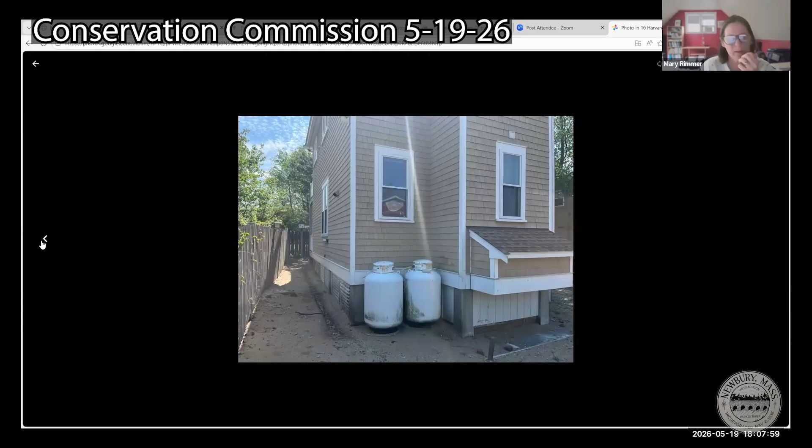They may have had on-house work done, but there was no signs of any ground disturbance or anything like that. Okay, but we don't know whether or not there was any requirement for maintaining dune vegetation or anything like that. I didn't see anything in the order, but I can double check that.

Harvard. Yeah, there was no written special conditions on the order that's attached in the folder. Okay, I don't think we have too much choice here, so.

Another one. Yeah, yeah. Hey, and then Mason, we're getting some feedback on - you know what, what did you just do, Mason? Did you? I didn't do anything. That was me, Bob. I've got a noisy air conditioner. I'm going to dial it down. Okay. Thank you, Mick.

Mary, anything else? No, thank you. Okay, thank you, Mary. Well, I'll skip over Mick. Frank, any questions on this one? No, Bob, I don't have any questions. Thank you. I'll wait for Mick to pop back just to see if he has any.

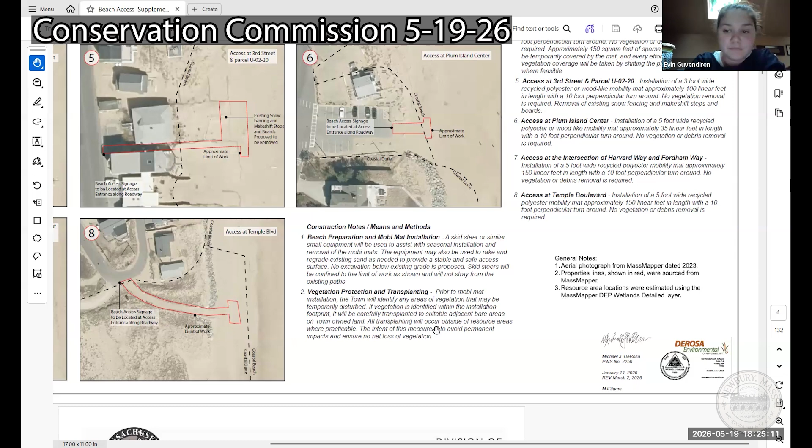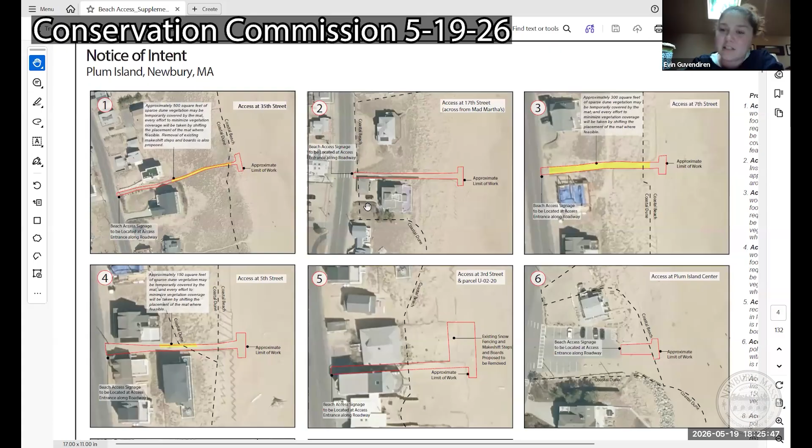At the last meeting, which was quite a while ago, an abutter had requested some signage be installed at the entrance of the mats to promote leashed dogs. So we've included signage at the entrance of all these access ways to remind pedestrians to keep dogs on leash, not trample the dune vegetation, and remain on the path.

So those are the main updates. I can also show you the letter of no take with conditions from Natural Heritage.

They had requested four conditions to be included in the order: a time of year restriction, April 1 to August 31st, which is breeding time of year for shorebirds; and the beach grass transplanting note I discussed earlier. The authorization duration says this letter is issued for 5 years.

And then there's the Wetlands Protection Act notice. We did include a shorebird protection plan in this order too, if the commission wishes to reference it in the order. That will be followed if activities take place during the breeding season. But that's pretty much it for updates.

Happy to answer any questions the commission might have. I'm just curious, is the leash law now part of our wetland protection bylaw, or is it?

It just seems strange that we're putting notations about leashed dogs in an order of conditions. Not that it's not a good idea, but I think the signage was just requested. It's not an enforceable condition in the order, it's just a friendly reminder to pedestrians. So it's a suggestion. Unless you choose to add it to your bylaws.

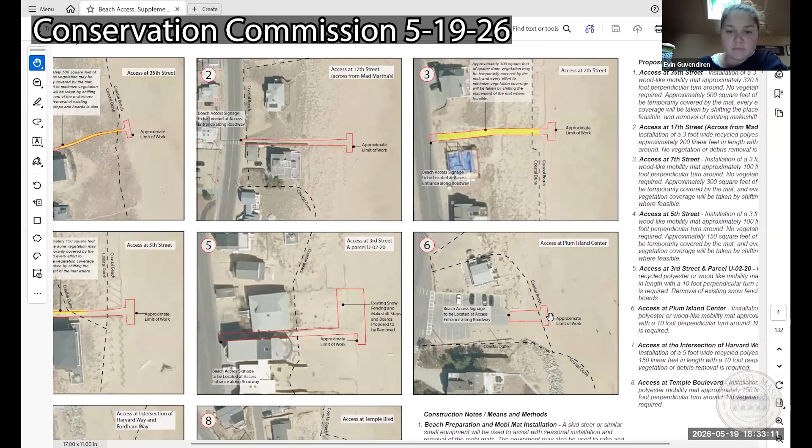Okay, so we could condition it that it not be used for vehicles. Mm, vehicle use, yeah, I mean, they're not wide enough for the typical vehicle anyway, 5 foot one, but just to clarify.

There was a note on your plan about grading and raking. I wanted to review the language a little more because we can't change the beach form or dune form as part of this project. We need to work with what's there to a certain extent, except for evening it out enough to actually roll the mats out.

I wanted to see where you said the equipment may also be used to rake and regrade existing sand as needed to provide a stable and safe access surface. No excavation below existing grade is proposed. So you would not be grading anything technically on the beach itself.

It probably doesn't even lay the mats right on the beach itself. It's just where the dune is kind of blown out a little bit. Correct, yeah, it's just the incline of the profile.

There was some discussion in the supplemental material that the skid steer would push material up from the beach onto the dune, and I don't think we want to be doing that at all. Where did it say that, Mary? I didn't see that.

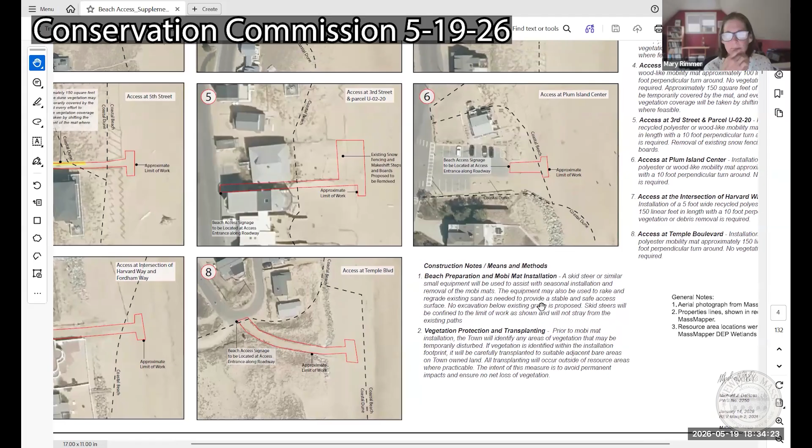The narrative part? Yes, your supplemental narrative. Usually it would come from an upland source, not off the beach, you're not introducing any material. No, we're not introducing material.

It says they want to include raking of existing beach sand, including skid steers as needed to provide safe access. It's not proposed to bring in any sand or remove any sand from the beach. So I just wanted to be clear that we're not going to be pushing sand up from the beach onto these areas where the mats are going to go.

No, and you guys can condition that if you want to explicitly say that in the order too. Just wanted to make that clear. That's all I have for now. Thanks, Mary.

Woody, any questions for Evin on this or Mason? I'll just make the comment on the signage. We don't have a leash law in town, but suggest leashes for dogs and for people, because they both can wander off the path. Some sort of wording for people as well to stick to the path. That's all, otherwise I don't have any other comments.

Thank you, Woody. Mick, any questions or comments? I just noticed the term that they were seasonal mats.

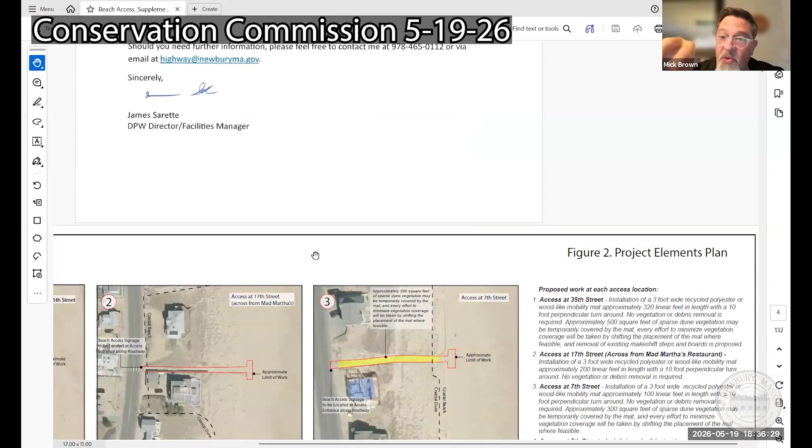So are those delineations on your plan also the limit of work area? Yes, approximate limit of work. Okay, so what's the method for marking that, so a skid steer operator knows where he can and cannot go?

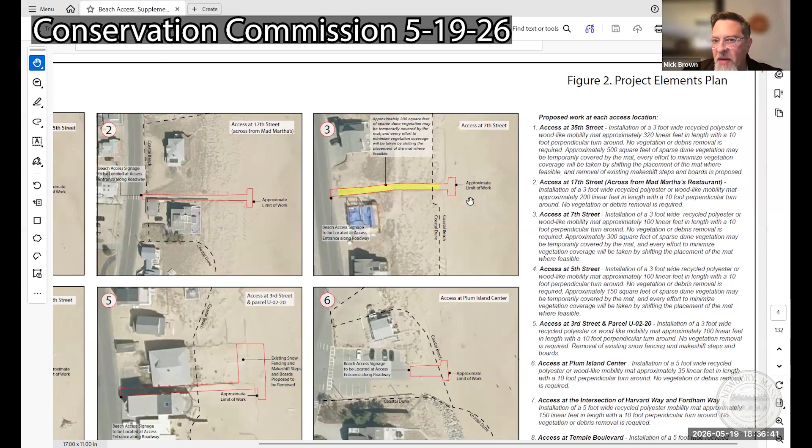From a practical standpoint, having seen these installed for the last decade or two, picture a carpet runner that gets rolled out starting at the top, then rolled up and carried off. It doesn't weigh hundreds of pounds. It's more like a 4-foot carpet runner, but made of a Scotchgard type of material, so sand and moisture pass through it. Blowing away is more likely than needing a machine to take it in and out.

The only time a machine would be needed is for restoring some of the right-of-ways to a decent condition. Okay, well, that's helpful, thank you. Frank, any questions on this one? No, thank you.

I don't have any questions. Mason, do you have anything to add? I'd just say I think you're right. From DPW's eyes, we're not going to bring machines on the beach unless we absolutely need to, so rolling them out from the roadside will be easiest. The only time we'd need machinery would be to establish the paths before they're actually rolled out and laid out.

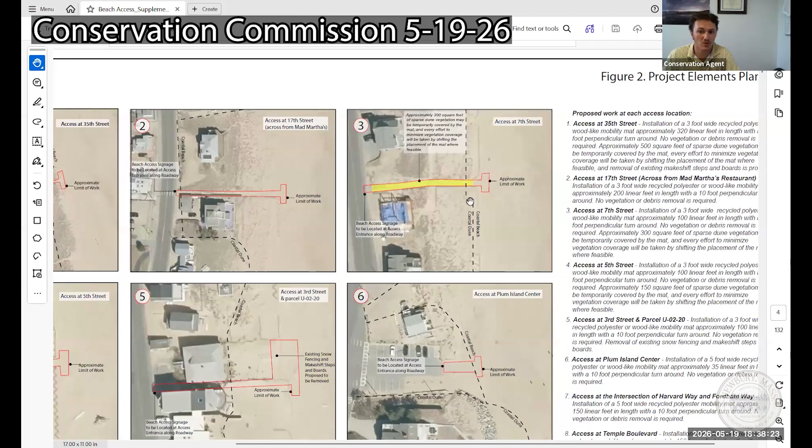The only other thing I'd add is I talked to Amy with Natural Heritage earlier. It's up to the board, but since the determination letter was issued, I believe if the board is comfortable approving tonight, we're allowed to condition it, confirming our shorebird protection plan after the fact—so that would be prior to the start of any work.

Okay. Are there any other questions from the members, Mary? I want to circle back to make sure you're all set. I communicated with Mason late this afternoon about some special conditions on this one.

I'm amazed because the Blue Hotel had stairs and beach management stuff, and other than having a monitor during shorebird season, that seemed to be the only thing, and it worked fine with DEP and Natural Heritage. I guess the point is the town is trying to be proactive here—they've been maintaining right-of-ways and putting in mats for the last 100 years, or private parties have been putting in the mats. I'd rather make this more accommodating than punitive.

I don't think the Blue used a skid steer though—they didn't have equipment that they brought. But they talked about putting sand over rocks in their beach management plan, though not mining it off the beach, but working in the upland, which would be the same situation for trying to maintain a right of way that may have wind-driven sand blown one way or the other.

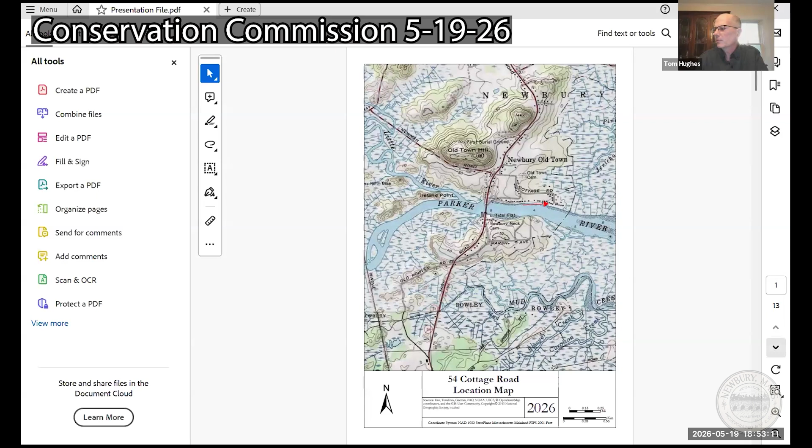So you should be able to see my screen now. I'm just going to flip past all these things. So the neighbor that we met with is John Proto Pappas, I believe is the name. He's across this sort of shared drive that accesses the property.

His view is through the understory over the septic system, kind of in a little bit of a wedge. He sees under the canopy of these trees, and it's mostly lawn under there, with a break in the shrubs along the shared drive that he sees through. Our plan in the floodplain alone has a couple saplings right out here. We looked at them in relation to the septic, and they just weren't a good idea anyway. They're out of the riverfront, so we're not going to do those.

But we are looking to increase the size of the saplings we'd be planting closer to the river so that the planted canopy is high enough off the ground. We estimate about 6 feet is what he's looking at under right now, so we'll make sure the bottom of the canopy on the saplings that go in is 6 feet or taller, so that we preserve that ability to look under and see the river.

We're also going to look at the shrub placement that was in that area and some of the species. We have some 7-ish foot tall shrubs. We're going to try to just adjust the heights, keeping with good native plants for that area, and adjust locations slightly to try to have the least negative impact on that neighbor's view. We can still meet all the requirements of having a good native restoration area by just adjusting our plantings a little bit.

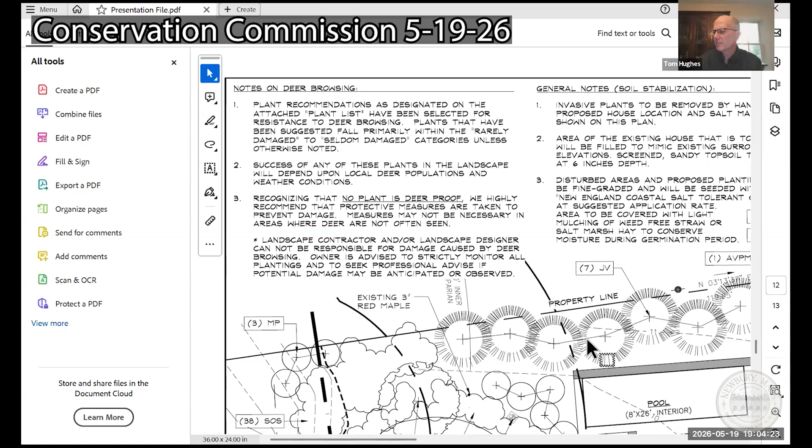We do have on our landscape plan red cedar going in that area to create a buffer, but in their comments, sent in today, I barely had time to read them, but I think they were stressing their desire for this to shift.

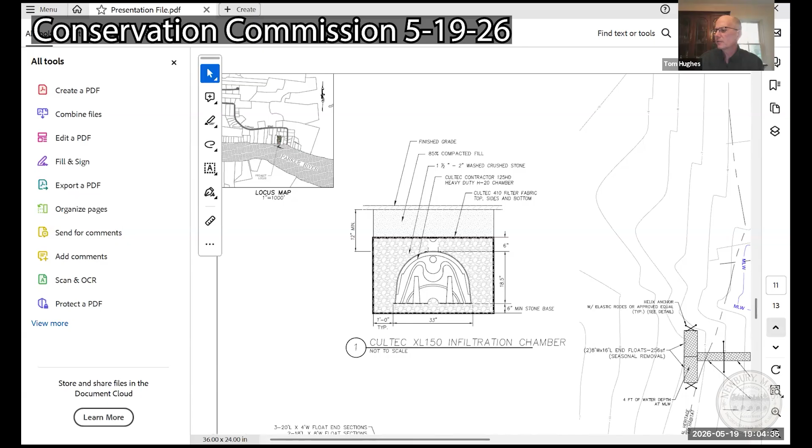And when you look at the constraints we're under - while there's not a specific section of the regs on ACEC, it does say if you're doing anything in Wetlands Protection Act in the ACEC, you can't adversely affect the functions and values for which it's been listed as an ACEC. And generally DEP always tries to get you as far out of it as possible. So I do think I can still make a case that we're certainly not adversely affecting if we're only going in 12 or 14 square feet versus what we are now.

But we have a septic system here. There's a mandatory offset to a septic system. My experience has been that if we were replacing the septic they might let us get closer to a garage if that was our only place to do it, but certainly not much closer. But where we're putting a structure, they're going to hold us to 10 feet at the Board of Health off that. We're at 15 because of the location and grades associated with the septic.

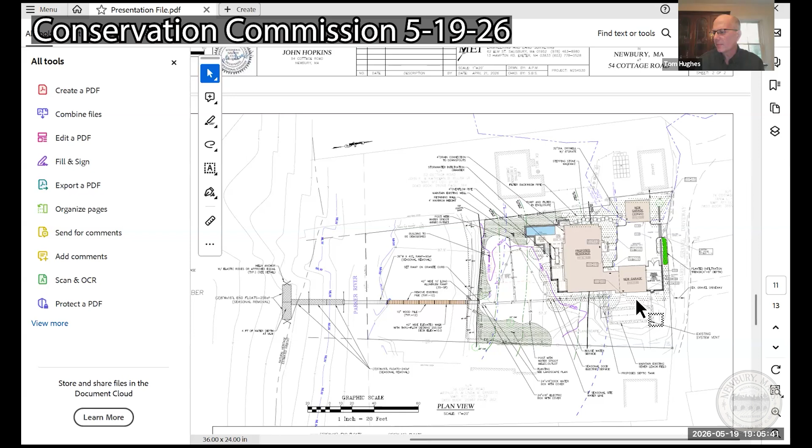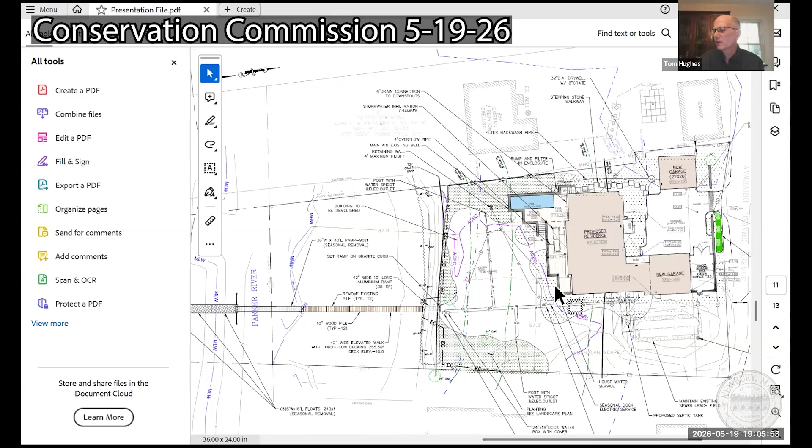But the engineer looked at it and said he could slide the tank over a little bit, and he thinks he could make 5 feet work. But the reason he hadn't pushed the engineering on that was because the goal we had talked about as a team was getting entirely out of the ACEC, and sliding this ends up bumping over that line. So we're up against it - the ACEC pushes us out, as do the riverfront regs, which generally try to push you further out. If I use the hybrid approach, degraded lets me stay closer to the riverfront, but the hybrid approach also makes me respect the 10.58(4) requirement to be as far from the riverfront as possible. So we kind of have to slide back from the river, out of the ACEC, and over from the septic.

So it forces us to be in this general pocket, but we might be able to wiggle it and create a little bit more room. And if we move it 5 feet or even 4 feet, that almost doubles the separation to the property line. I think that would be a meaningful improvement for that neighbor. So we do want to give it a good shot at trying to do that.

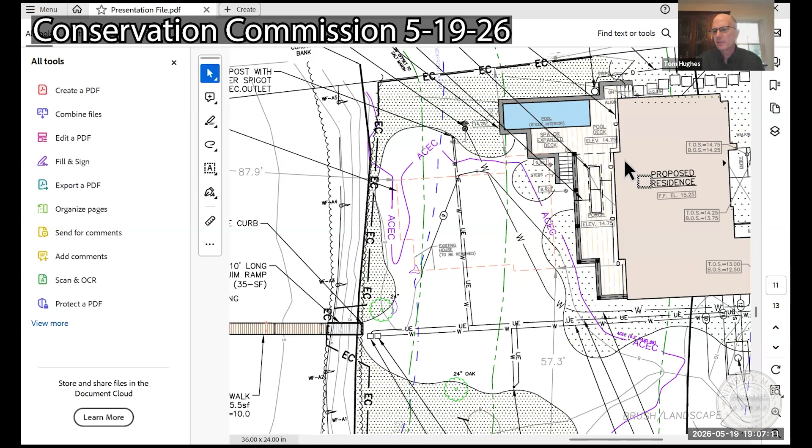So Tom, the effort is to accommodate the neighbor more so than anything else? Yes. Okay. But I don't want to go to all that and then come back in and have you guys kill it for crossing the ACEC line.

Nick, anything else? No, thank you, I appreciate it. Okay, Frank, any questions?

So in order to make the case, the regulations, as Mary touched on, don't say that you can't put something in the ACEC, and the commission has in fact in some cases permitted structures in the ACEC. But you have to not adversely affect the functions for which the ACEC was listed. And since the comparison is to existing condition, and we have an existing house within the ACEC, the commission does have the flexibility to allow some structure to go back in to replace what's already there.

If I didn't have anything there, it would be a much harder argument to say that I could put this within the ACEC. But I do think this is something where the commission does have the discretion to do it, and doesn't necessarily have the obligation to maximize the benefit to the ACEC. But it's a good goal.

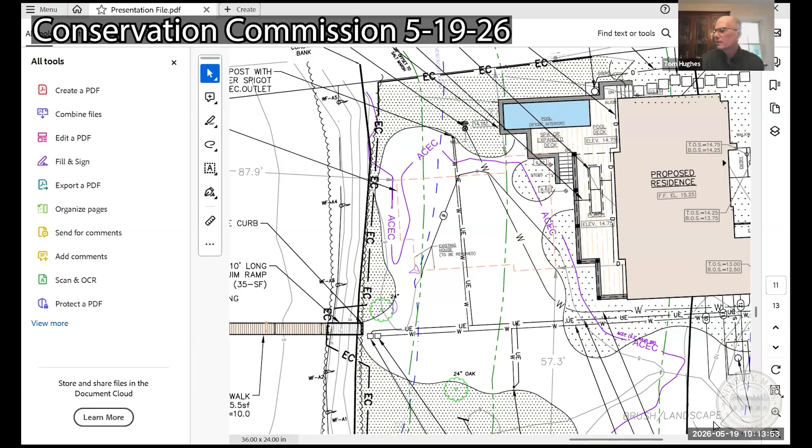No, other than site visit. I think so, the site visit. And one thing, Mary, I'm sure you've seen it, but the last page does have a bunch of tables, including degraded and how much of the degraded area is being redeveloped and how much is not. So the basis for all the numbers is there, but I'll be trying to package that all together.

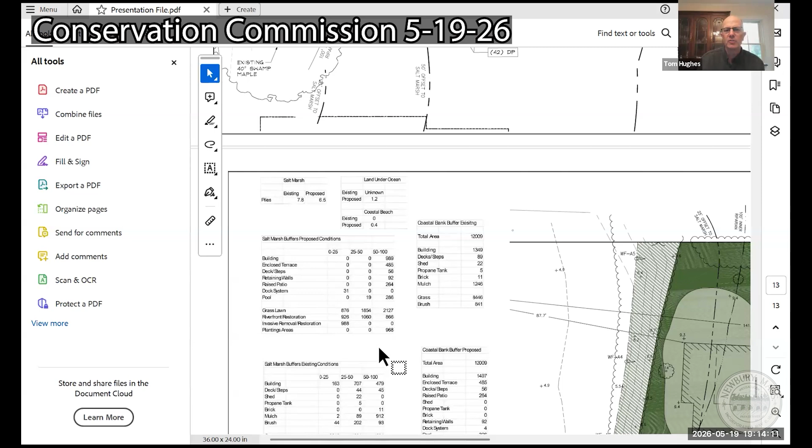And go through my narrative and fix it. It was my backup regulatory argument, I think, that needs the most cleanup. The other numbers do seem to work by about 40 square feet, but I'm going to run the math again and make sure that's clear, because on a project like this, it's one of the more complicated regulatory analyses under the Wetlands Protection Act.

The other thing is, if Marine Fisheries sends a letter, they have a habit of sometimes only sending it to the conservation agent. So if Mason gets it, if you can just make sure to forward it to me, that would be great. All right, so we're going to set a site visit, just getting out my calendar.

Memorial Day weekend's coming up. I mean, the earliest would seem to be Tuesday the 26th, which would be the Tuesday of a week from today. I just throw that out there as a starting point. Or what's your pleasure? It would be helpful to have some of the building corners staked out. So I don't know, Tom, you might need some time to do that.

I think we can get that done pretty quickly, depending on the day you guys are looking at. I'm available on Tuesday morning, the 26th, if that's what you would like to do. Is that Tuesday viable? We could do it. Okay, so you'll have time.

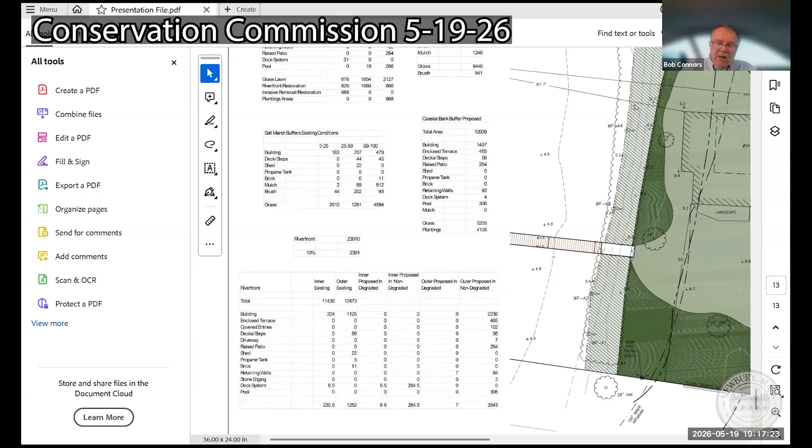Yes, I am. Okay, I'll entertain a motion to continue the public hearing to June 2nd at the applicant's request. So moved. Second. Thank you, Woody. Roll call, all in favor? Mary? Yes. Woody? Yes. Mick? Frank? Yes. And Bob Connors? Okay, thank you, David. Tom, thank you, take care.

Okay, next matter is a continued public hearing. DEP file number 0501460, 45 Boston Road. Applicant is submitting a notice of intent to expand existing boardwalk systems within proximity to bordering vegetated wetlands.

Mason, what's going on here? Is this being continued? It is. We're still waiting on the infield delineation, so I can go out and confirm that, so then they can also quantify their impacts within the resource areas. Just waiting on that, and then they'll be ready to come back to us. That's been done because I walk back there all the time and the flags are up. Oh, good to know. Well, I will follow up and reach out with Ned then, and I can confirm that.

Okay, well, I'll entertain a motion to continue the public hearing at the applicant's request to our June 2nd meeting. So moved. Second. Roll call, all in favor? Mary? Yes. Woody? Yeah. Mick? Yes. Frank? Yes. Bob Connors? Yes.

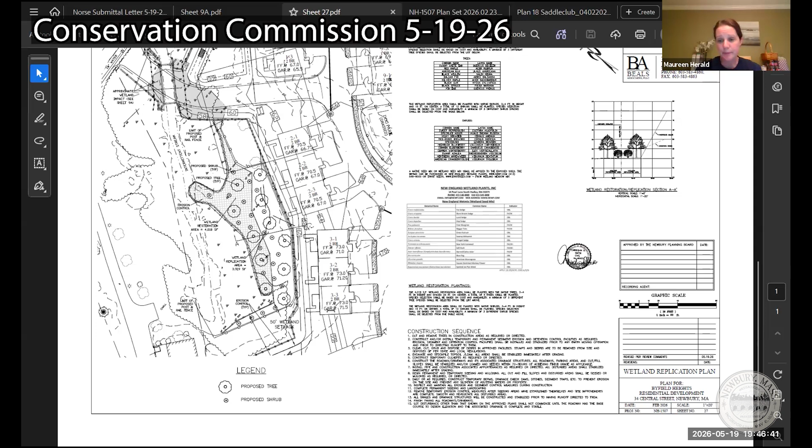I think this is kind of a combination thing. One is a small item and the other one's a little bit larger. There was some discussion about the DPW, or some response from the DPW saying that the 12-inch culvert that goes under Central Street has never had a problem. I'm not surprised, because if it backs up, it's going to back up onto this property and the neighbor's property, not onto Central Street. So I'm not sure that resolves my concerns about the condition of that culvert and whether it can accept the runoff being directed towards it.

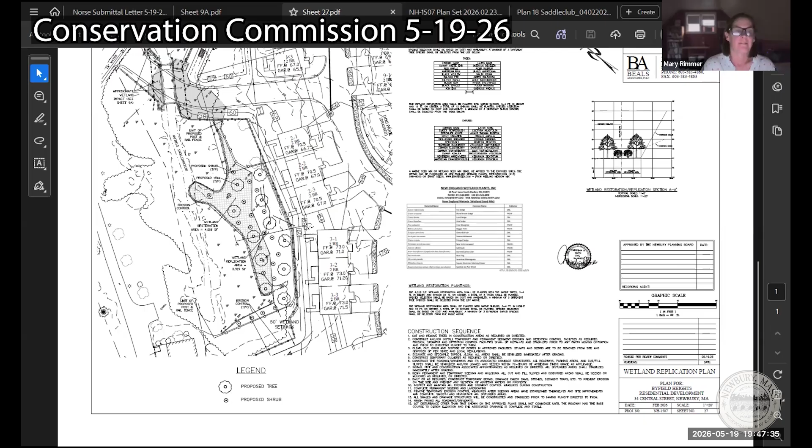And then to the larger question of this discretionary fill, yeah, I agree with what's being said that in theory, you can allow up to 5,000 square feet. There are two ways you can allow filling for a roadway. One is a limited project, in which that's the only way to access the property.

And you have to cross the wetland, and you can theoretically even alter more than 5,000 square feet in that case. We know there's another potential access, whether that's available or not, for logistical and technical reasons, which we can consider. We can't consider safety, but we can consider logistical and technical reasons. Then the discretionary fill could be allowed, provided that we're avoiding adverse impacts and minimizing and mitigating impacts.

The fact that this crossing doesn't meet stormwater standards means we're not avoiding impacts. I'd like to hear about what we're expecting the stormwater runoff from this crossing, where it's expected to go. If the oil and grease from vehicles traveling on it is just intended to shed directly into the wetland, then we're not minimizing impacts. If it's pushing water into an adjacent property and causing potential flooding concerns there, then we're not minimizing impacts. So I'd like to hear more about the stormwater design for the crossing and understand better why our peer reviewer is just saying it doesn't comply, but okay.